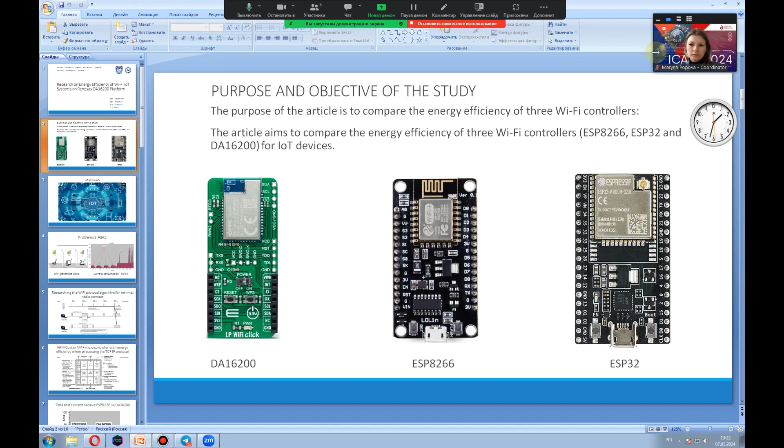IoT philosophy. The Internet of Things is the nervous system of the future society extending into every home. Just as electricity, water, gas, and heating were once brought into every household, the ideal element of such a global nervous system is a small device powered by batteries for 3, 5, 10 years or more. This device transmits and receives data to an internet gateway, automatically connecting to its cloud.

At first glance, this engineering task may seem straightforward, but in practice, creating such an IoT device has proven to be more challenging than sending a spacecraft to the edge of the solar system. This is because, in addition to these requirements, the cost of such a device must be $5 or less. Additionally, data transmission must be well secured, and emerging trends suggest incorporating edge and fog computing to reduce the load on cloud servers and minimize traffic volume.

Currently, this task is technologically unfeasible. Essentially, the challenge is to create a high-performance element that consumes minimal energy, costs nearly nothing, and is capable of transmitting data through concrete walls over hundreds of meters. The question arises: is it worth investing efforts in solving such a complex problem? The economic gain from the efficiency of IoT in terms of collecting various data from objects seems dubious.

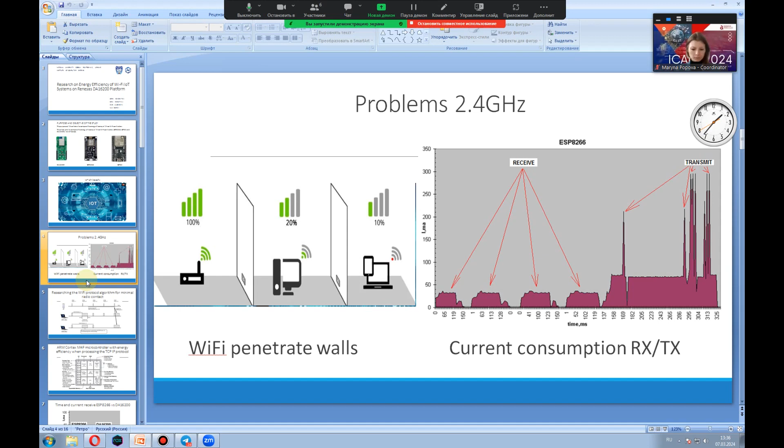The existence of deep physical limitations led engineers to consider the idea of long-term continuous connection of battery-powered IoT to Wi-Fi as impossible, even though everyone understood it would revolutionize IoT. This is because a Wi-Fi router is present in every home, eliminating the distance problem and the need for a non-standard internet gateway device. However, engineers at Renesas managed to reduce power consumption during reception to values in the tens of microamperes. This allows IoT to stay online with a Wi-Fi router for a year or more, depending on the battery capacity and the amount of transmitted data.

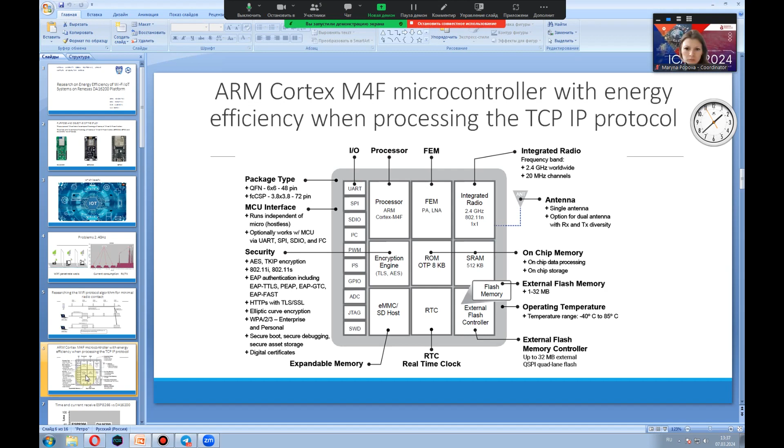The solution involved researching the Wi-Fi protocol algorithm for minimal radio contact while maintaining a constant connection to the router. The second step was to create a Wi-Fi microcontroller with maximum energy efficiency when processing the TCP/IP protocol. The idea was to reduce the processing time and therefore power consumption if it wasn't possible to reduce the current consumption during TCP/IP processing. The ARM Cortex-M4F microcontroller was chosen and fast code for TCP/IP processing was developed. This resulted in a record low processing time, only 2 milliseconds for data reception.

For comparison, the most efficient ESP-NOW code on competitive Wi-Fi microcontrollers like ESP8266 has a processing time of about 130 milliseconds, roughly 70 times higher, leading to significantly higher power consumption. Renesas named this set of methods for reducing power consumption during reception and maintaining constant contact with the router the Virtual Zero technology.

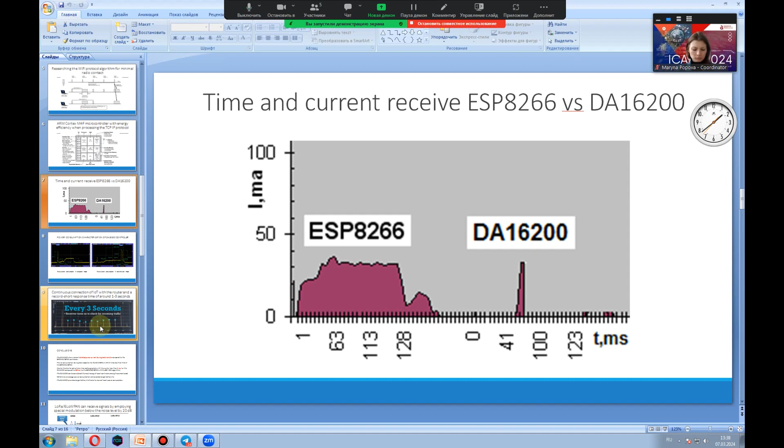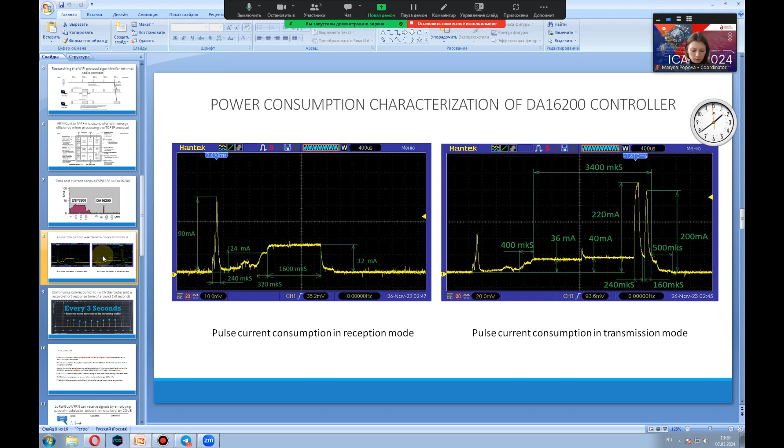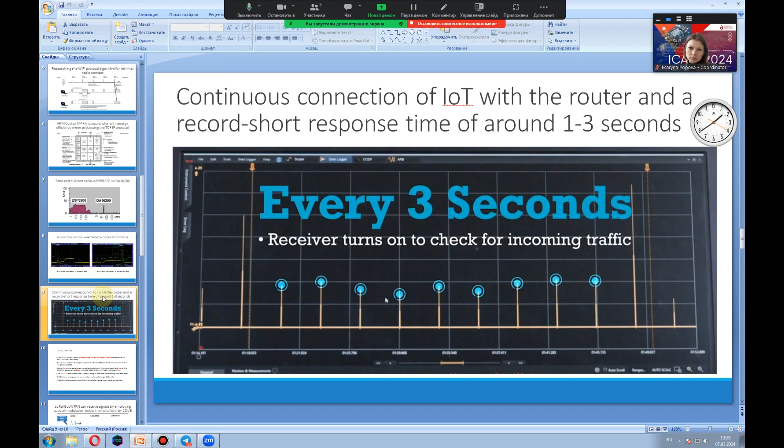It is essential to note that Virtual Zero technology only saves energy during reception. Thanks to this, it allows establishing a continuous connection of IoT with the router and a response time of around 1 to 3 seconds, enabling the management of IoT devices with acceptable delays. For example, it becomes possible to control locks, lighting, and other household items that execute commands while in the reception

mode. For IoT devices operating in transmission mode, including numerous meters transmitting readings twice a day or less, the Virtual Zero technology almost does not extend battery life. This is because constant connection to the router is not required for such IoT devices, and the connection to the router approximately once a day, taking about a second, has almost no impact on overall power consumption. The energy consumption for transmission in the Virtual Zero technology is the same as in other controllers.

Bypassing the limit of high power consumption in Wi-Fi transmission is impossible due to the physical laws of radio wave propagation at a frequency of 2.4 GHz. These waves poorly penetrate walls due to very short wavelength. This disadvantage is compensated with high emission power. However, research can be conducted to reduce emission power since the distances within the home to the router are small, and the radio wave power from IoT can be increased by using a directional antenna. However, we have not encountered such research.

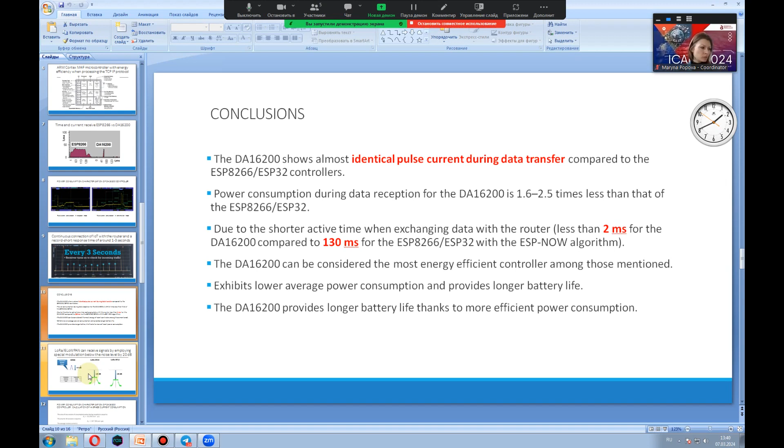Radically reducing power consumption during transmission is possible using different protocols and radio transmission ranges, with the most promising being the LoRa and 6LoWPAN system with spread spectrum. It utilizes radio waves below 1 GHz, which penetrate walls several times better and can receive signals by employing special modulation below the noise level by 20 decibels. However, such systems require a specific gateway for internet access.

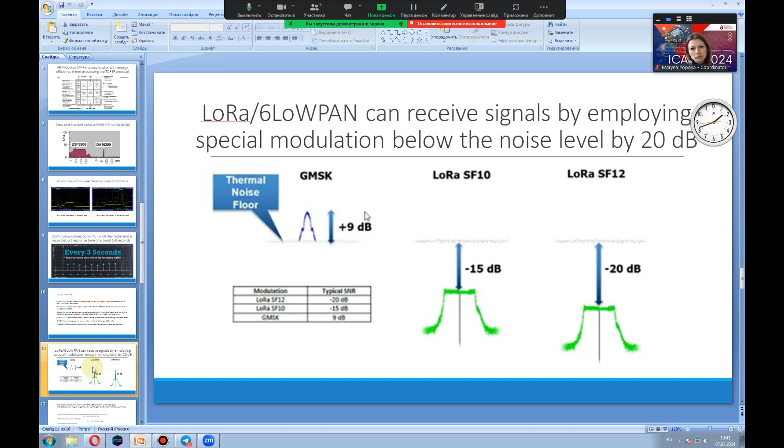Despite the lowest consumption levels during transmission, the 6LoWPAN system has minimal transmission speed, which can drop to levels of a few dozen bits per second. These systems are necessary when frequent but small data volumes need to be transmitted, such as for real-time monitoring of meter readings and other sensors. However, it's crucial to remember that these systems do not work with usual Wi-Fi routers and require the purchase of a specialized internet gateway.

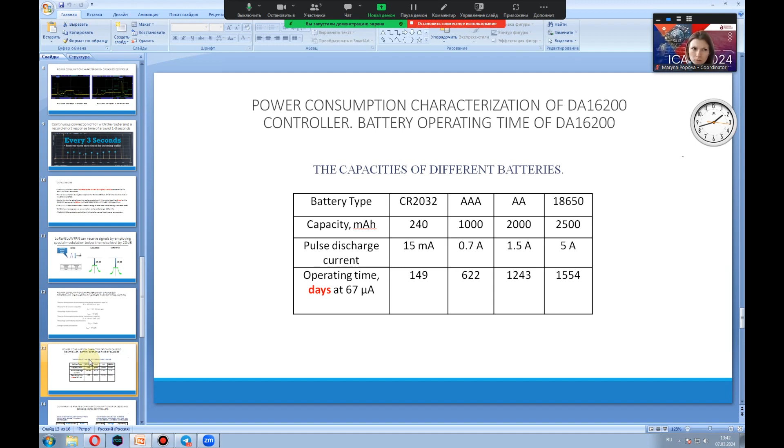Nevertheless, it can be said that the Virtual Zero technology is revolutionizing the IoT world as it solves the problem of managing battery-powered IoT through Wi-Fi with a delay of around a second, which was previously deemed impossible. Previously, such IoT devices constantly in reception mode connected to the router required power from a power adapter. In the IoTMark Wi-Fi test, the DA16200 received a score of 850, equivalent to approximately 850 days of autonomous operation for IoT with 2 AA batteries.

It is expected that the intelligent door lock will last more than 3 years without recharging, which is 50% longer than the nearest competitor can offer. For the first time in Wi-Fi history, it can provide autonomous operation time for IoT controllers comparable with ZigBee and Z-Wave. However, it's essential to remember that ZigBee and Z-Wave require the purchase of a special router, while Virtual Zero technology does not. Thank you very much.

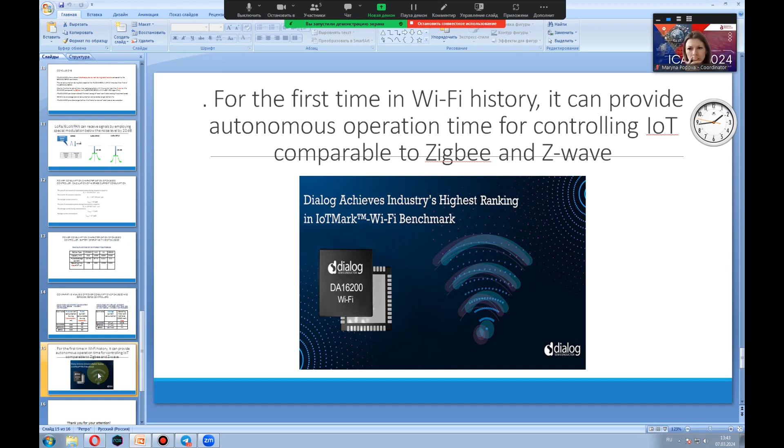I have ended. Okay, thanks for your presentation, and maybe our colleagues have questions for you. Yes, I have.

Could you please explain in which subject area you apply or implement this controller? Okay, this controller we implement in the smart home. It may be a usual home, 1 or 2 floors, not large. And most important, it's control of IoT in a time from 1 to 3 seconds, very quickly. When we need to control IoT with very small time, this technology is very good.

Yes, but the Internet of Things can't exist just by itself. For what reason do you use these Internet of Things controllers or sensors? For what? Yeah, understand. It can, как это разделить? IoT can be divided into 2 groups. The first group is Internet of Things which we control. We send any command to the Internet of Things. It's one class. In the second class, we don't send any command to these Internet of Things. The second class is a large class which simply measures levels and transmits these levels to the cloud.

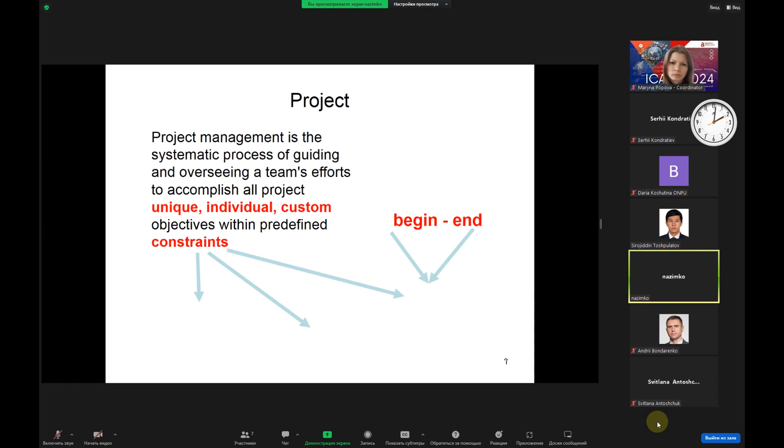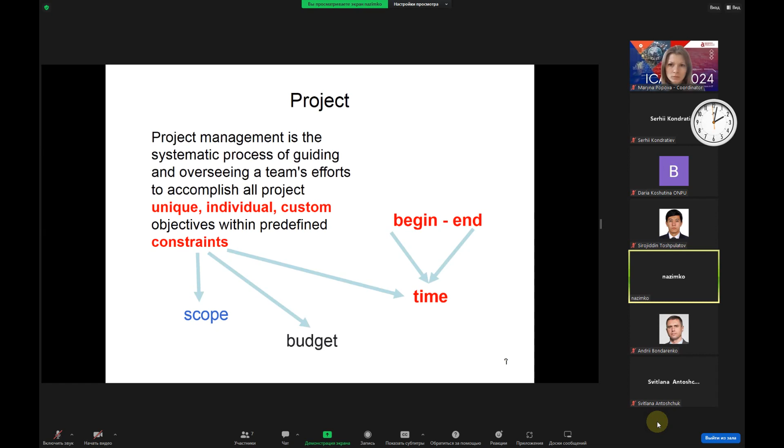Project management process is deployed under certain constraints, namely scope constraints that must be coordinated with aims of the project. It was not unusual when a customer revealed some deficiency in a project product. The project budget, the second constraint. Approximately half of the projects overrun their budget. For example, the new Berlin airport has overrun initial budget several times. More than half of the projects finished later than has been planned. We consider this issue when a project is deployed in uncertain environment.

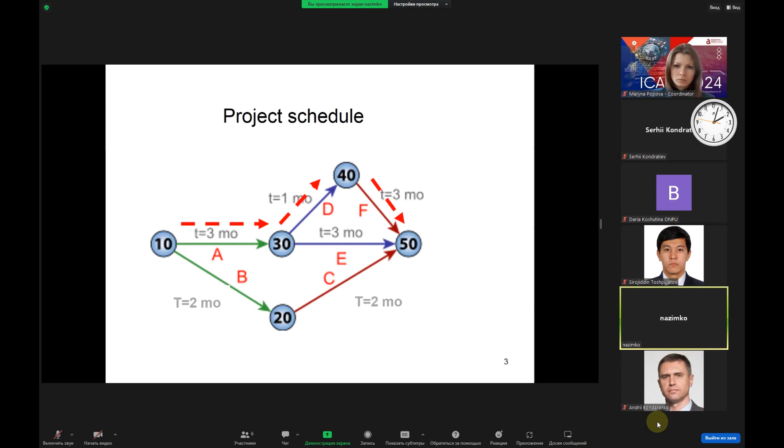Next slide demonstrates a project schedule, which is an oriented acyclic graph. The arrow indicates the tasks, and the node corresponds to a certain moment in time. Duration of the tasks is indicated in months. For example, task A has been planned to accomplish during 3 months, etc. A critical path that is the longest chain of the antecedent tasks determines the span of the project. In this case, the critical path is the sequence of the tasks A, D, F, because 3 plus 1 plus 3 equals 7 is the longest period.

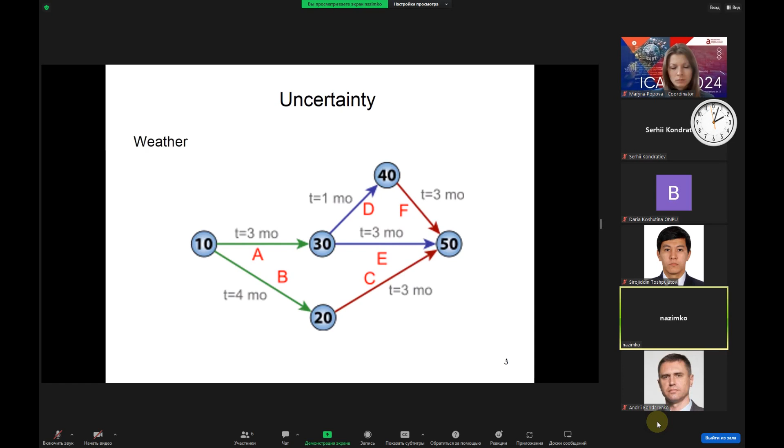Unfortunately, there are a lot of uncertain factors and conditions in reality: weather, crisis, pandemics, and so on. First of all, a task duration is frequently vague. So-called PERT approach uses 3 estimations of this duration, namely optimistic, average, and pessimistic. However, these values have different probabilities. That is why Monte Carlo simulation provides the most reliable assessment. We use empirical distribution of the task duration as the main input parameter.

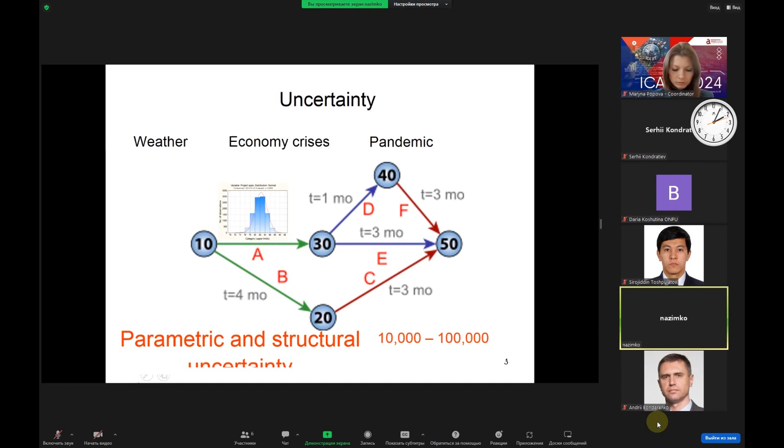Computer selects duration for every task according to probability or empirical frequency, and simulates the project schedule many times, say 10,000 and even 100 thousand times. When the results of this simulation are integrated, we were those who emphasized not only parametric uncertainty, but as well structural one. These are probability of the tasks and their correlation to structure. Slide number 5 shows a test project schedule having both serial chains of the tasks and parallel. Serial and parallel chains.

So far, experts emphasize the most critical path or the longest path and neglect the other critical paths as false or minor, secondary, or subordinated paths. However, life and practice have shown that these paths may replace each other, and there might be several critical paths during project deployment. Such variability of the critical paths forces to change the project management tactic several times, and it is considered a disadvantage. However, Monte Carlo simulation has shown that multiplicity of the critical paths is a natural effect of the parametric and structural uncertainty. Therefore, we developed another approach to manage project schedule. The whole set of possible critical paths should be determined on the basis of Monte Carlo simulation.

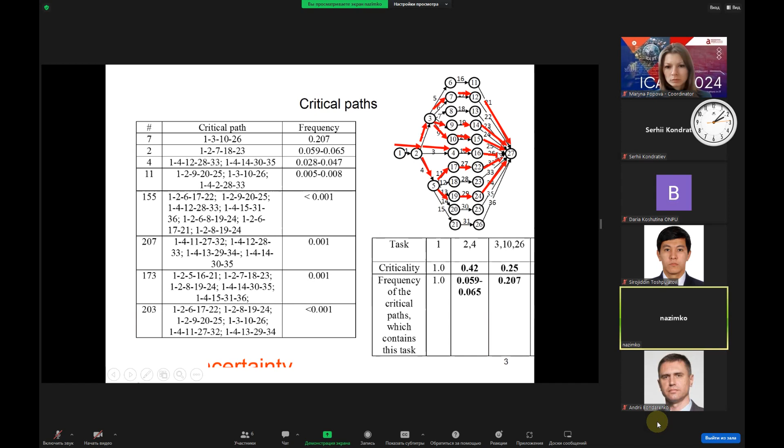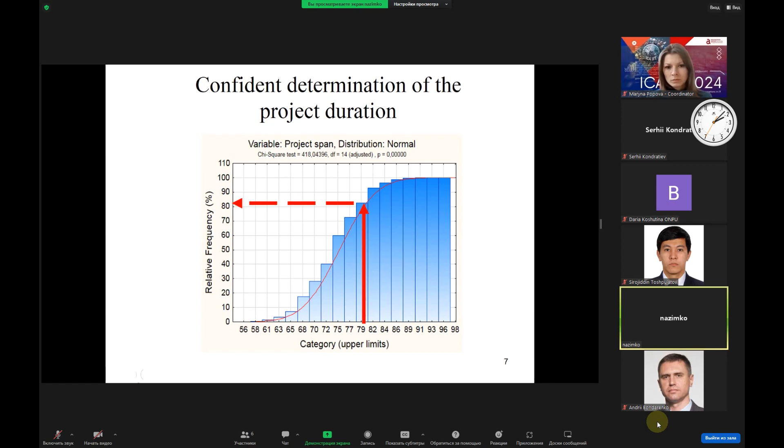Such an approach provided increased confidence during project schedule analysis and assessment. For example, 80 days duration of this project occurs with probability of 0.82. Such an approach is an efficient tool for risk management. For example, probability of the task can radically change the critical path probability. The first numbers indicate the case when probability of all tasks was 1, and second numbers indicate redistribution of the critical path frequency after decrease of task 9 to 0.5.

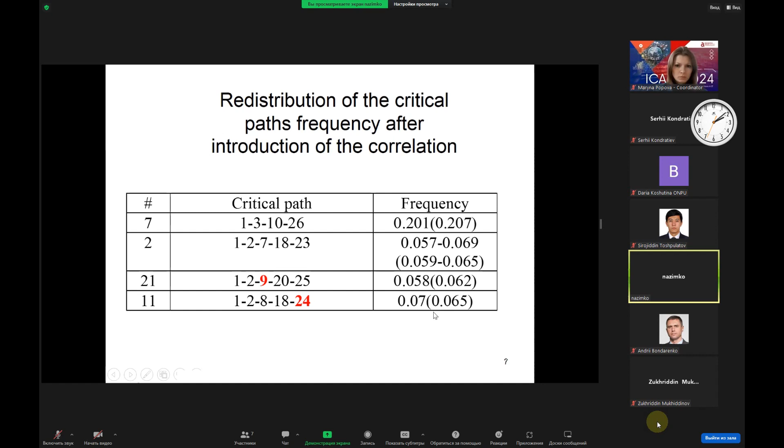The same effect causes task correlation. When tasks 9 and 24 correlated with probability 0.8, frequency of the critical path changed. So, multiplicity of the critical path generates structural uncertainty of the project schedule, having causal variation of two parameters. First of all, its tasks and certain durations. Furthermore, the critical path can branch out, which provides more effective dissipation of energy and information. Having multiple critical paths is advantageous for effective project control, as it enhances the ability to manage and maintain the project's timeline within the scheduled limits.

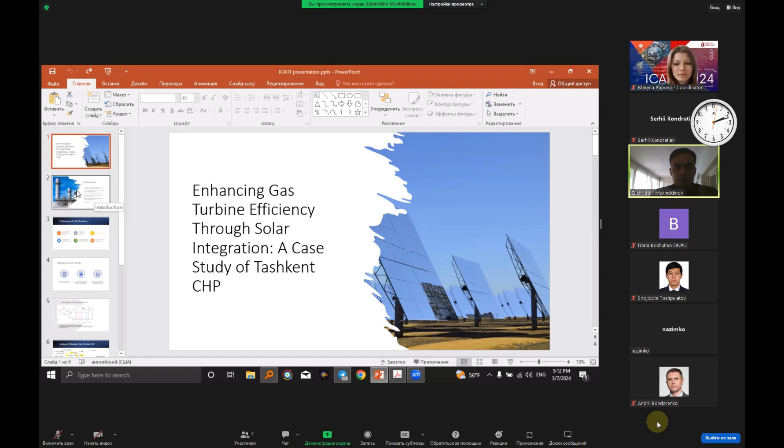My research topic is enhancing gas turbine efficiency through solar integration, a case study of Tashkent combined heat and power plant. For the introduction, for 25 years in our energy sector we experienced stagnation, which meant that we didn't build any power plants or find ways to increase our power production. That's why we currently have an energy crisis, meaning our energy demand is much higher than energy production. To tackle this, the President of Uzbekistan created the Ministry of Energy, which is currently focusing on using renewable energy sources.

Fossil fuel resources are limited, and on a global scale fossil fuels are decreasing year by year, so renewable energy sources are the priority. That's why our Ministry of Energy is stimulating renewable energy sources in power plants and households. As for the challenge, gas turbines have really high fuel consumption, especially at part load condition. Fuel consumption increases dramatically away from the design condition. Over the years, efficiency of gas turbines has been increased by increasing turbine inlet temperature or compressor efficiency.

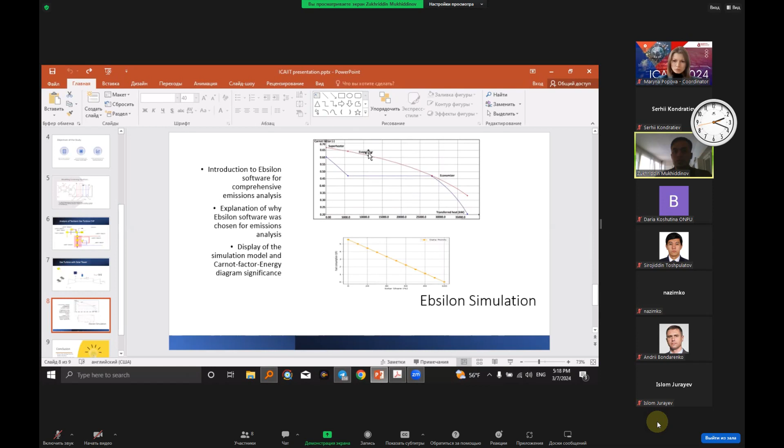So in conclusion, I can say that by integrating renewable energy sources like solar power into gas turbines, we can reduce fossil fuel dependency. We also achieve decreased electricity costs. And these kinds of applications, I think, are more environmentally friendly, and this is the future way of producing energy. Thank you for your attention.

Thank you very much for your very interesting presentation. Of course, the topic of reducing carbon footprint is at the top of discussions in the whole world. Is your approach flexible enough to be adopted, for example, in other plants in your country or abroad? Or was it developed only for this particular Tashkent plant?

No, our work can be used in any plant in the world or in our Uzbekistan system. But as the object of the work, we chose Tashkent CHP. And the reason we chose Tashkent CHP is because its load is 28.1, which is lower than others. And this work is developing step by step. And when I read other books and research topics, they didn't apply the system to high power outputs. So that's why I chose the lower power output of Tashkent CHP.

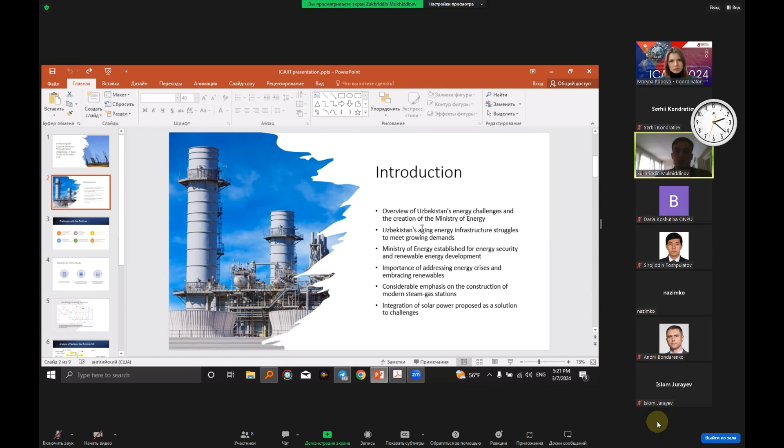At the proposition of the President, the Ministry of Energy was created, and our Ministry of Energy is currently stimulating the use of renewable energy sources, but the main problem can be investment costs. The initial investment cost is really high, but it can pay off in the long term. So the main issue is, of course, the initial investment cost.

And what other renewable energy sources could you also use? For example, wind or water energy sources? I'm sorry, I'm not really familiar with the conditions in Uzbekistan, but I know that in Kazakhstan there are a lot of windmills. And in Uzbekistan, could you use them also?

Yeah, in Uzbekistan we can also use wind power technologies and solar power technologies because our region is sunny 300 days a year. We can use many different kinds of renewable applications, but when it comes to gas turbine systems, we can only use the solar system. It's more profitable. Okay, thanks a lot.

And we already have a question from Victor Nazimko. What is the perspective for energy storage in your country?

Can you repeat again, please? The problem of energy storage in your country. Which perspective? Do you have, for example, a compressed air station or a pumped hydraulic station? Storage of energy.

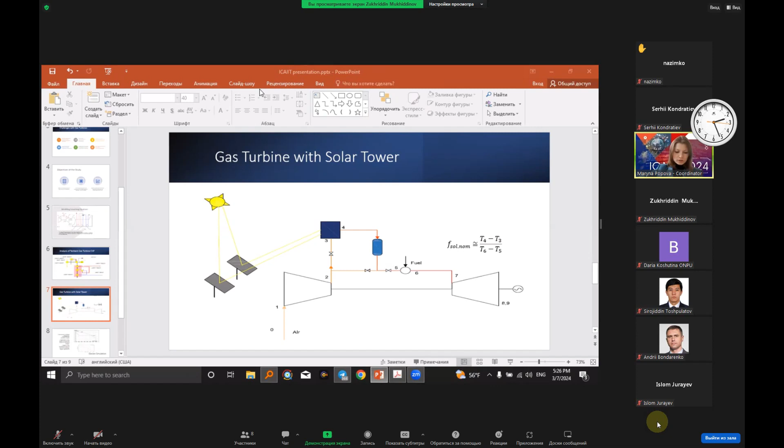Okay. Yeah, that was a question and you already answered. Victor, are you satisfied with the answer? Yeah, thank you. Thanks a lot. Maybe other colleagues also have some questions. No. And thanks a lot again for your presentation. Thank you. Now we will ask our next presenter, our next colleague. It's supposed to be Viktor Kukhar, but I believe that instead of him it will be Andrii Bondarenko. Yes, I'm here. I'm going to make my report. Okay, thanks a lot. Please, you're invited to the board.

And your topic, substantiating the jet agitator parameters for dredgers. Okay, I'm not really familiar with this specific topic. Yeah, it will be a surprise. Okay, do you hear me? Do you see my presentation? Yes, but if it's possible, a little bit louder and maybe closer to your microphone. My microphone is very close to me. Okay. So maybe a little bit.

Okay, I welcome the participants of the conference, and I would like to thank the organizers for the opportunity to make my report. Let me introduce our research work. Its name is substantiating the jet agitator parameters for dredgers. Researchers who participated in the study: Andrii Bondarenko, Viktor Kukhar, Dnipro University of Technology, Dnipro, Ukraine, and Arsen Nurmanova, Satbayev University, Almaty, Kazakhstan.

The purpose of the work is to develop a mathematical model of the underwater face formation by jet agitators, helping construct a contact surface of the turbulent washing jet with the granular minerals being washed out. The development of such a model makes it possible to substantiate rational structural parameters of the dredger's soil suction head with the jet agitators.

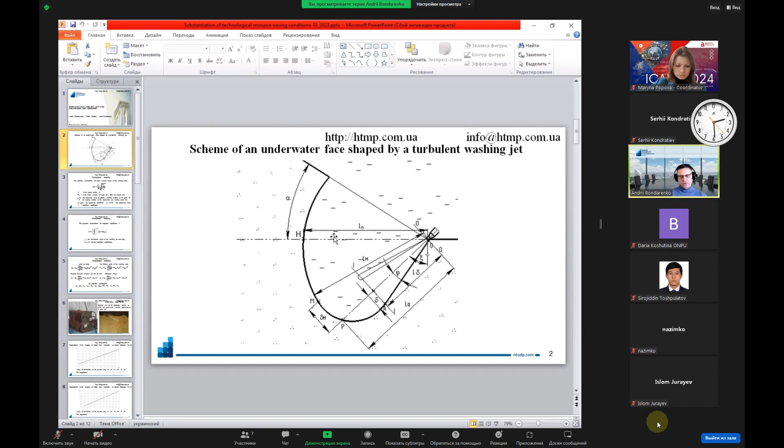Due to the change in the live section of the flow along the length, fluid flow movement in the main section of the underwater jet washing zone is smoothly varied. It has the following characteristics. Centrifugal forces are not taken into consideration. Live flow sections are treated as planar ones. Projection of the flow live sections on a plane perpendicular to the axis of the jet is a circle. Vertical flows are not taken into consideration.

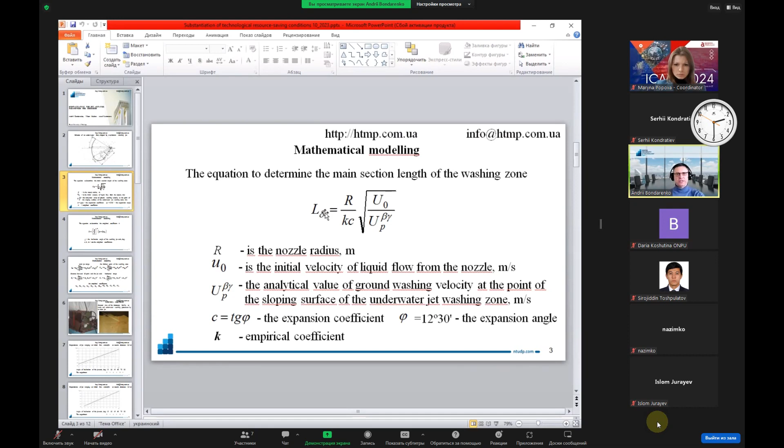The equation to determine the main section length of the washing zone is shown here. The correspondence of the mathematical model to the actual physical picture taking place in the underwater face of the turbulent jet becomes possible if empirical coefficient K is introduced into the dependence. Analysis of the empirical data obtained as a result of earlier experimental studies using the developed laboratory facility helps formulate a type of dependence of the coefficient K upon the initial velocity of the liquid flow from the nozzle and the angle of inclination of the jet axis. The equation is shown here.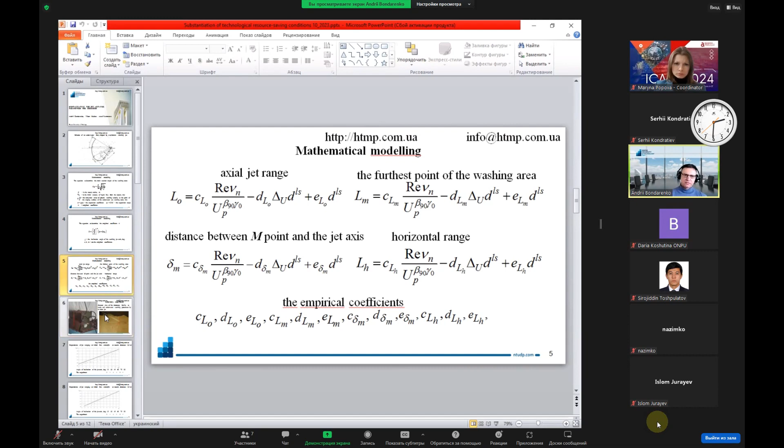Numerical values of the empirical coefficients were obtained as a result of experimental data processing during the study of soil washing by an inclined turbulent jet in the underwater phase. The procedure was studied in laboratory conditions when a turbulent water jet was applied to sand of medium grain size, the average of 0.265 millimeters, with slope angles of 15, 30, 45, 60, 75, and 90 degrees, and the diameters of the washing jet nozzle being 1.25, 2.0, 2.8, and 4.0 millimeters.

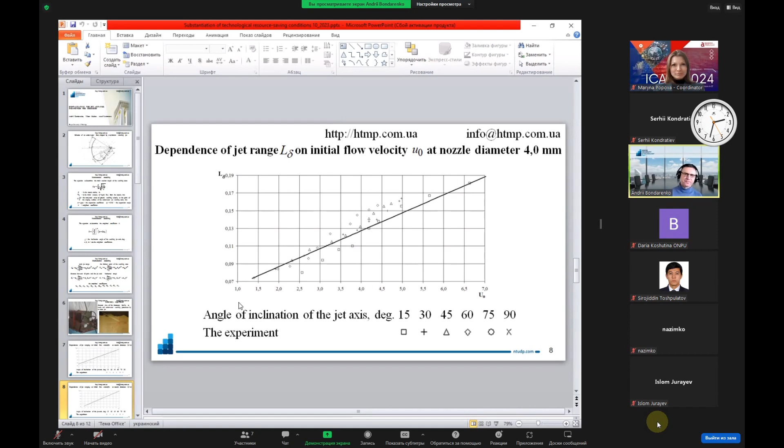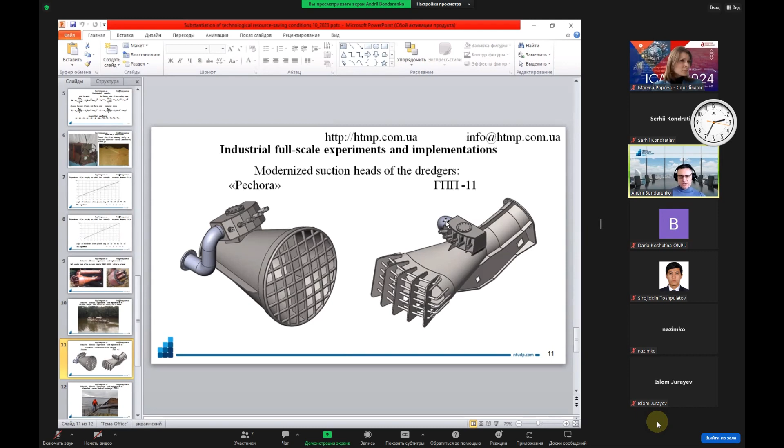Use of jet technologies to intensify soil washing in the underwater phase has made it possible to modernize the dredge suction heads with minimal interference in the design of the facilities. It is also important that such modernization needs neither specialized equipment nor personnel qualification. Moreover, it can be performed by the mining company in accordance with the current relevant standards and regulations. Pechora and GPP-11 dredgers updating has significantly increased their performance capability and efficiency of mining operations. Quantitative factors are being processed and improved.

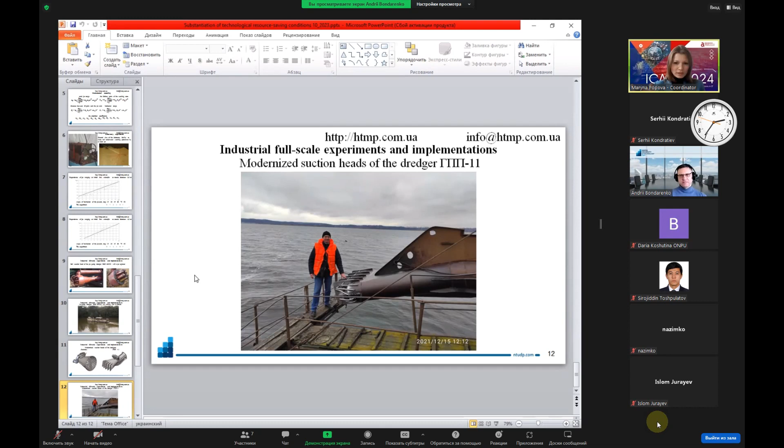Sorry, we with colleagues just discussed such an interesting implementation, and as I understood, in Ukraine it's impossible to implement it. It was implemented in Ukrainian quarries. For example, this kind of suction head was implemented in the specialized dredger NS630-90, and this was implemented in Ukrainian quarries, Ukrainian mining enterprises. Okay, because I saw on the slide Liberia. Yes, and here you can see the same dredger, but it was implemented in the Liberia facility. Sorry for interruption. It was the same machines. And here you can see only the suction head device.